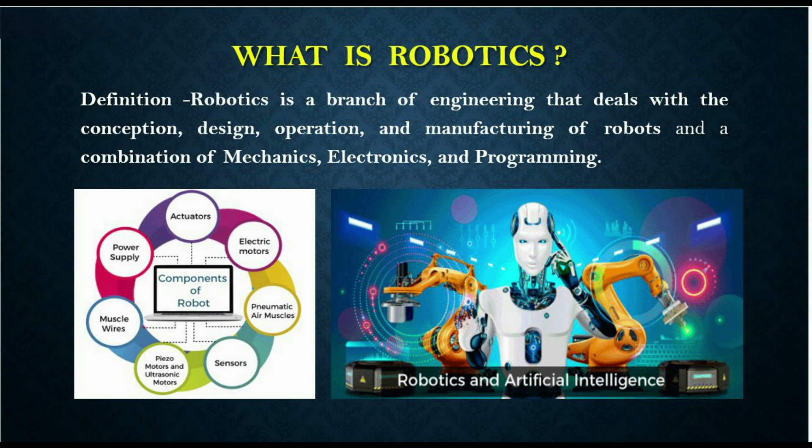How robotics is used in industrial robot companies. I'll explain some examples. The biggest four industrial robot companies are ABB, KUKA, FANUC, and Yaskawa. Another six popular industrial robotics companies are Comau, Epson, Kawasaki, Mitsubishi, Stäubli, Universal Robots, and the Cobot market.

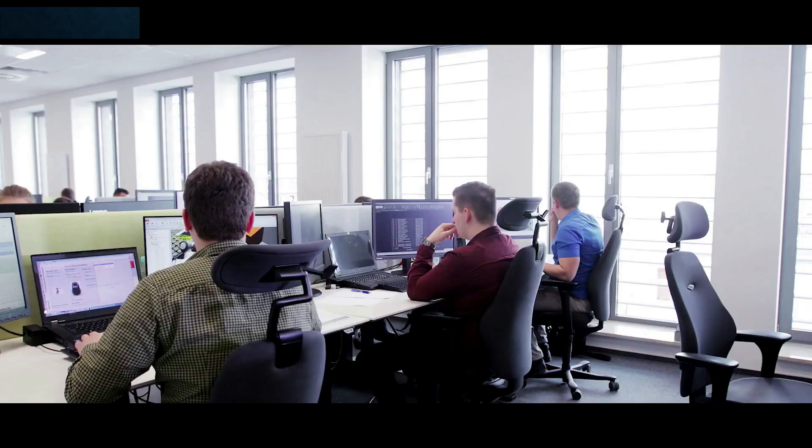Now we start the introduction of ABB Robot. ABB understands that it is time to unleash the commercial innovation of our customers and reinvent the value chain, taking a holistic approach end to end, breaking technology boundaries and delivering better service to society in a more efficient and sustainable way, like never before.

From pharma to healthcare, this plan has three steps: producing, distributing, and then operations at hospitals. Each phase faces tremendous challenges.

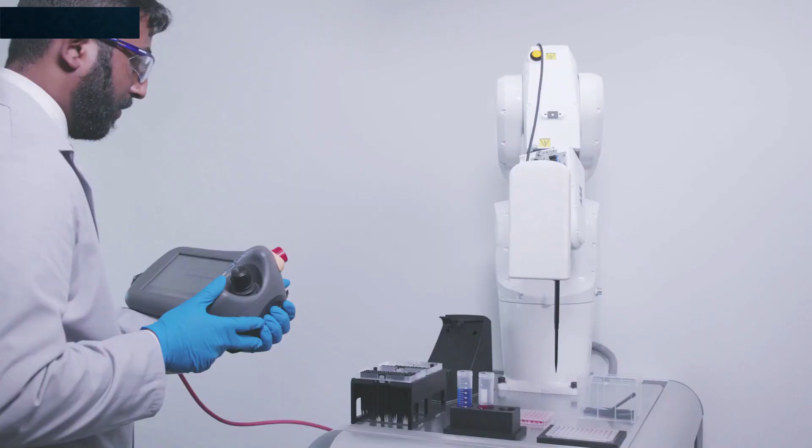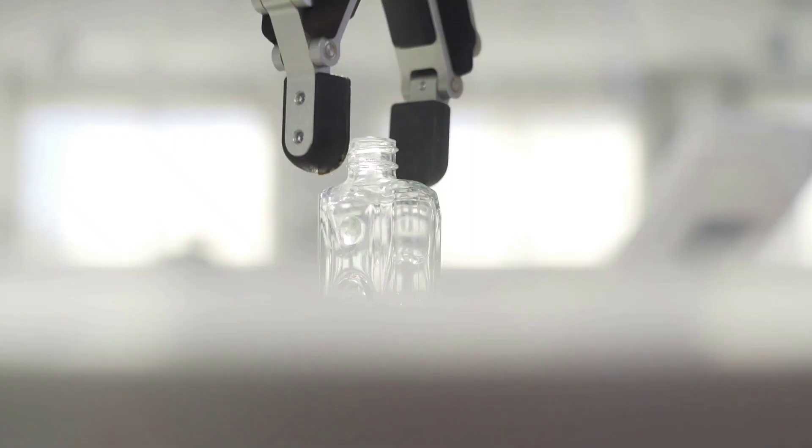The ABB Robot is used in the Texas Medical Center, USA. Josh, a healthcare solution business line manager, explains: we have more patients and more complex and advanced therapeutics to fight illness that were not possible some time ago.

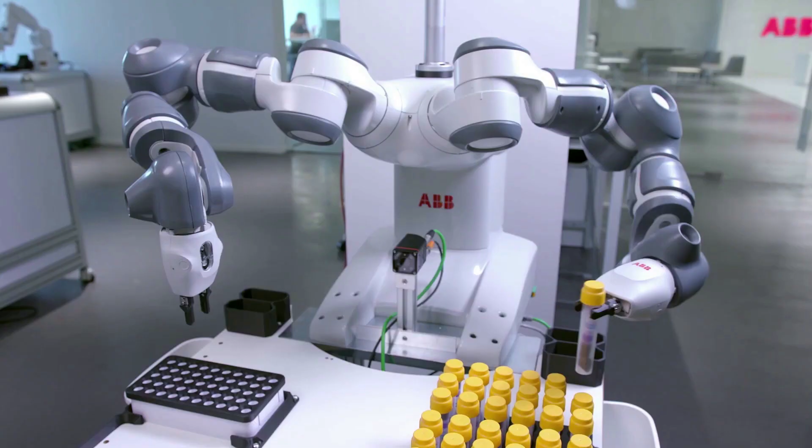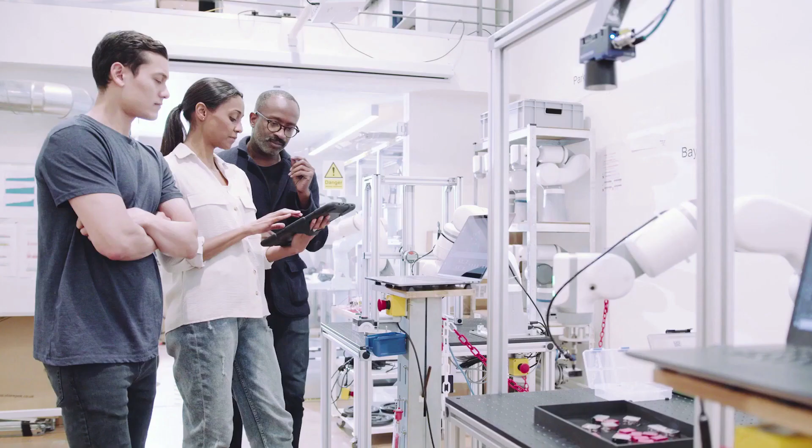At the same time, we have a lack of skilled workers, making healthcare unaffordable to many people. We are going to see new applications and new collaborative robots that will be able to adapt their work to the results of tests, but also to manufacturing of new therapeutics like biotech. If we want to help, we need to understand the issues, and how to bring a product that is stable, has the right quality, and maximum productivity in the best possible way.

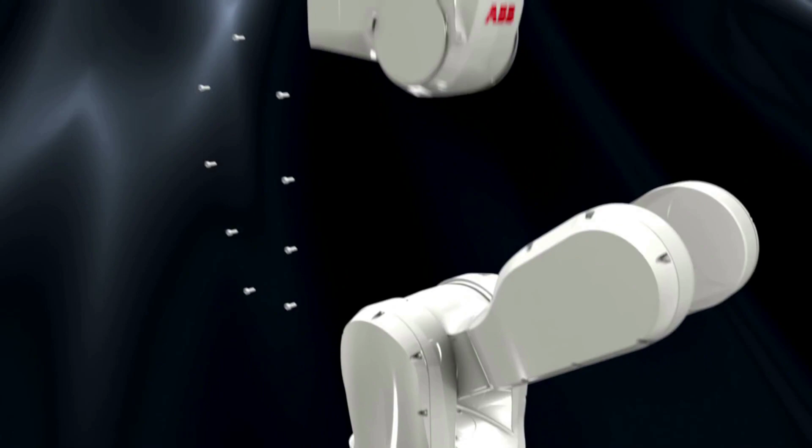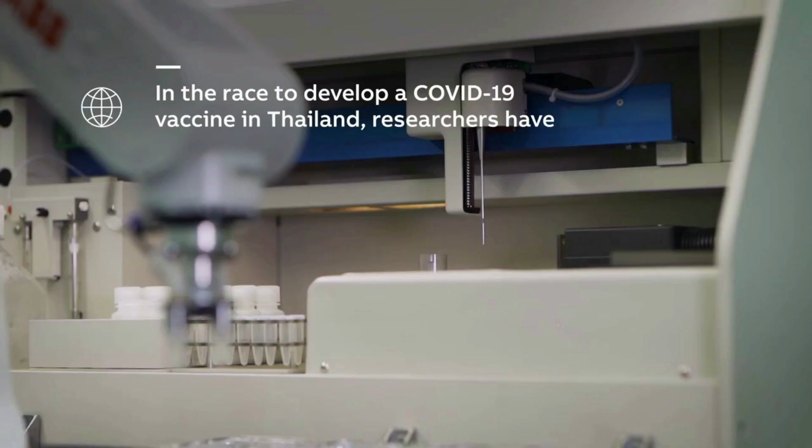We want a better planet and a better society, and technology will play a fundamental role in achieving this vision. Robotics will step out of the factories, making technology and this change more human, more related to people. One more good achievement for ABB Robotics: during the pandemic, the COVID-19 vaccine was developed at Chulalongkorn University. Just look at the example.

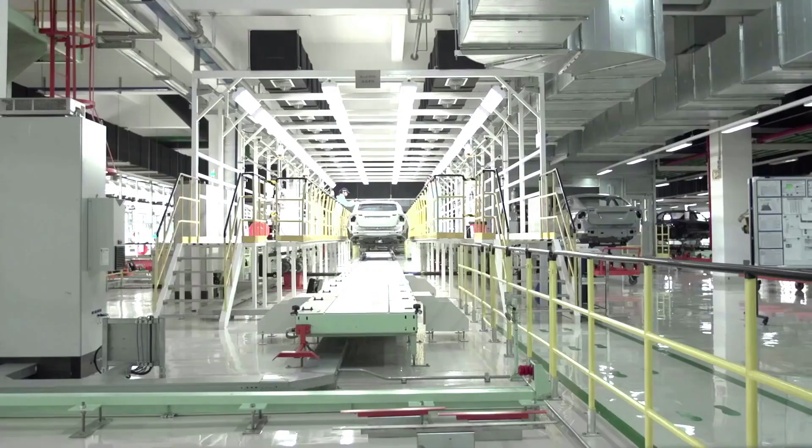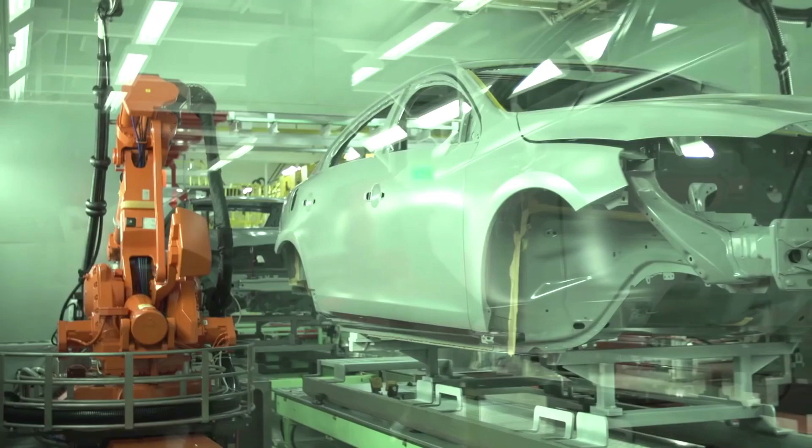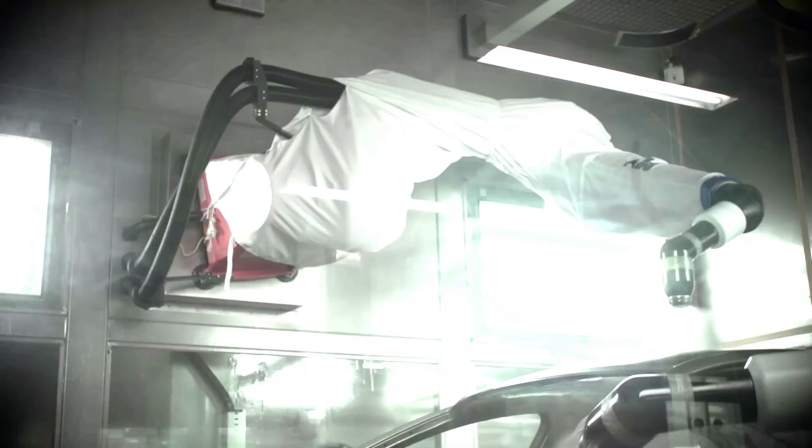ABB Robots are used in the Volvo manufacturing facility in Chengdu, China, a place of many firsts. It is the first and only factory to mass produce the new Volvo S60L. It's also the first Volvo factory located outside of Europe since the company was acquired by Zhejiang Geely Holding Group in 2010, and it's China's first automobile plant to use environmentally friendly water-based soundproofing and sealing material.

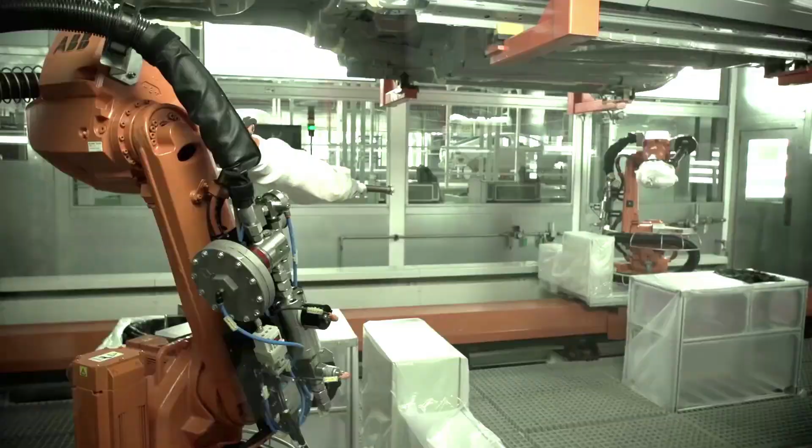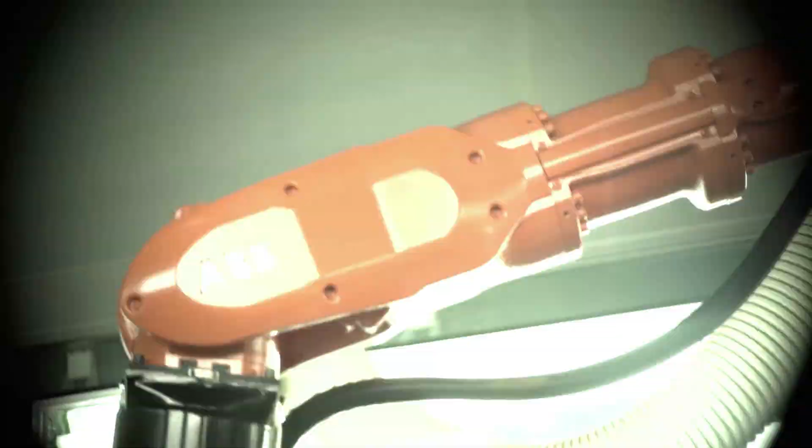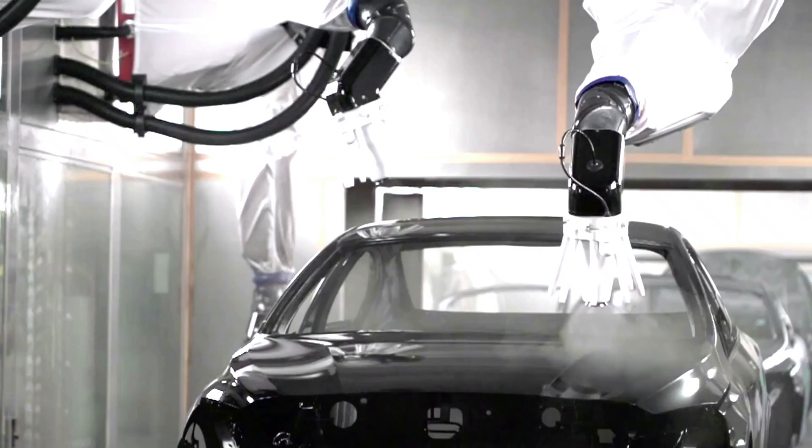Provided by ABB, Volvo is also exploring new ways to push the barrier for improving the quality of the vehicles' interior environment to fulfill quality to 100%. In some critical applications, we have chosen robot applications to ensure the Volvo standard quality. The Volvo Chengdu plant does a variety of jobs, including painting, dusting, and soundproofing.

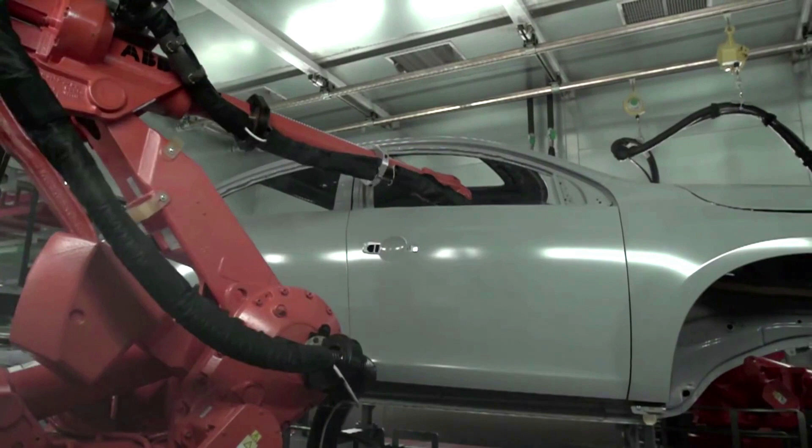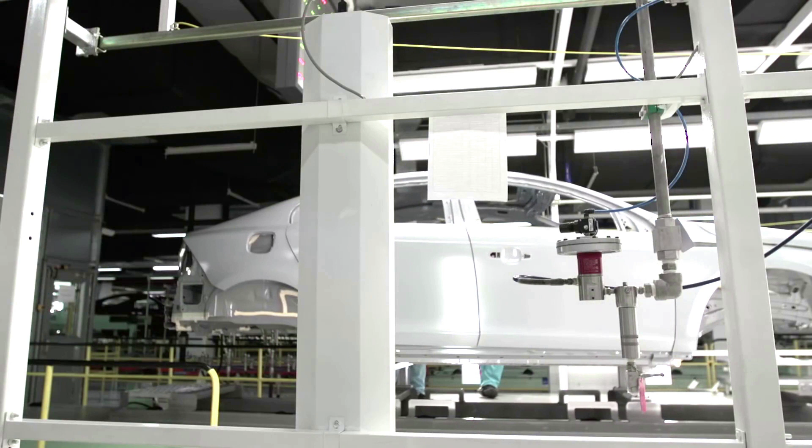The robots ensure that we consume the material efficiently, so we are limiting waste and saving floor space. We built fully automated stations where wall-mounted robots seal, paint, soundproof, and waterproof the cars, so we are working with waterborne materials: waterborne air primer, waterborne base coat, and we also introduced waterborne LASD material for the first time in China and the first time in Volvo's history, which of course improves the environment.

Now we'll see the FANUC robot. FANUC robots and factory automation solutions have been facilitating industrial production for over 60 years. FANUC is present in 120 countries, including Hungary, assisting key sectors like the automotive industry.

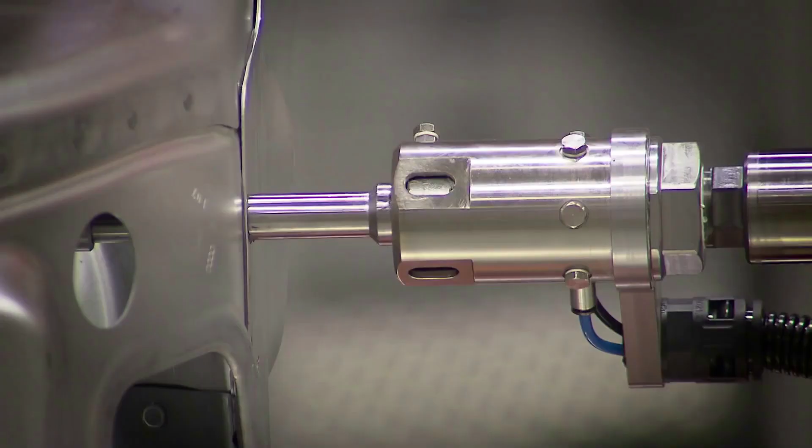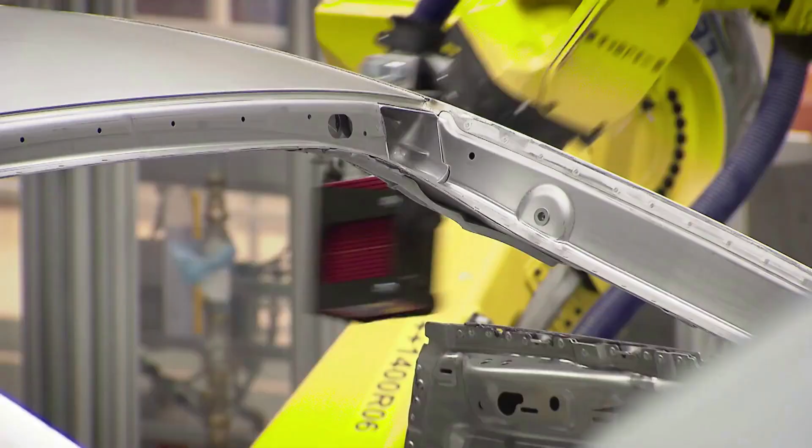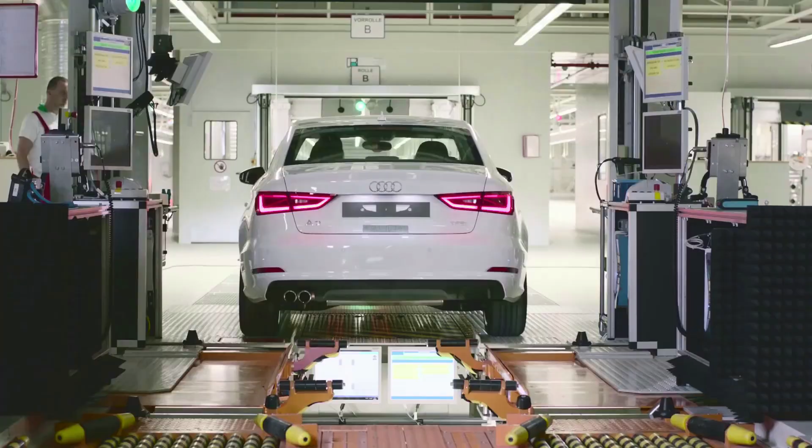For example, Audi Hungary Motor Limited factory, where they are developing and manufacturing cars for Audi AG and Volkswagen. Audi Hungary is one of the companies with the largest turnover and export in Hungary, producing 2 million engines and 135,000 cars in 2014.

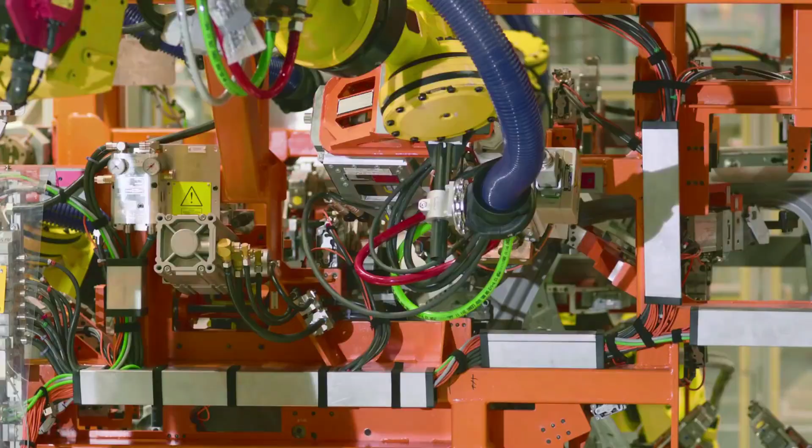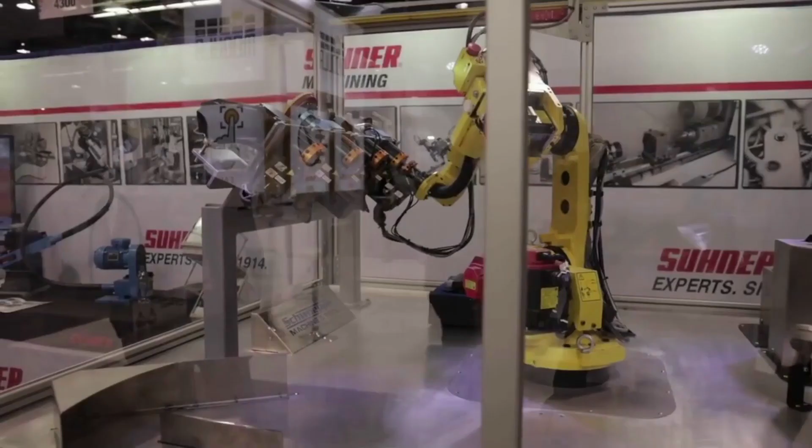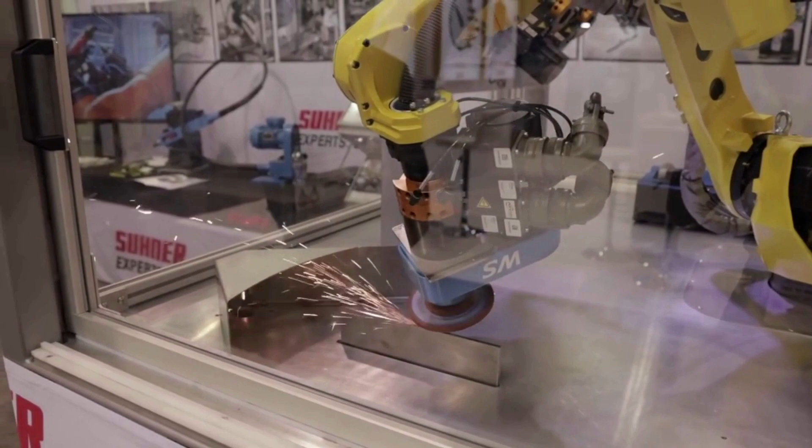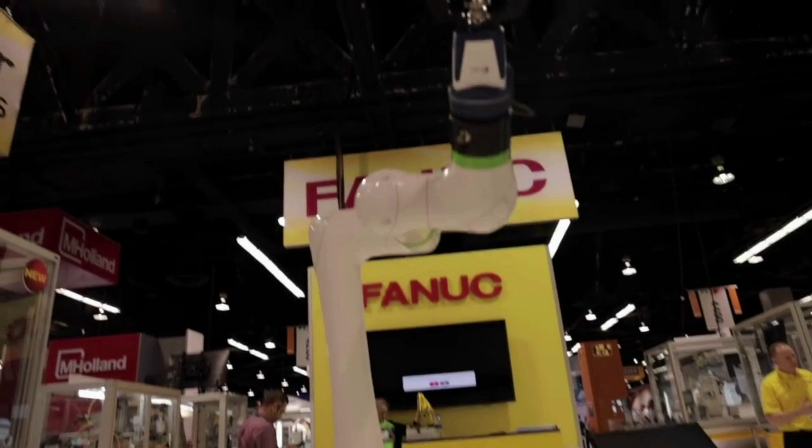We produce and install robots to reach our targets in environments where we need to work with high pressure or temperature. The robots are up to the task and deliver quality standards which would not be possible with human machining. Robots are used for applications too difficult for humans or where rapid machining is required. Our colleagues like working together with robots, as they make human work easier.

It's very important to program these robots correctly, because when problems arise, it's usually not the robot causing it, but improper programming or lack of maintenance. Regarding this, it should be highlighted that FANUC robots are easy to program, dependable, and the industry has had very good experience with them.

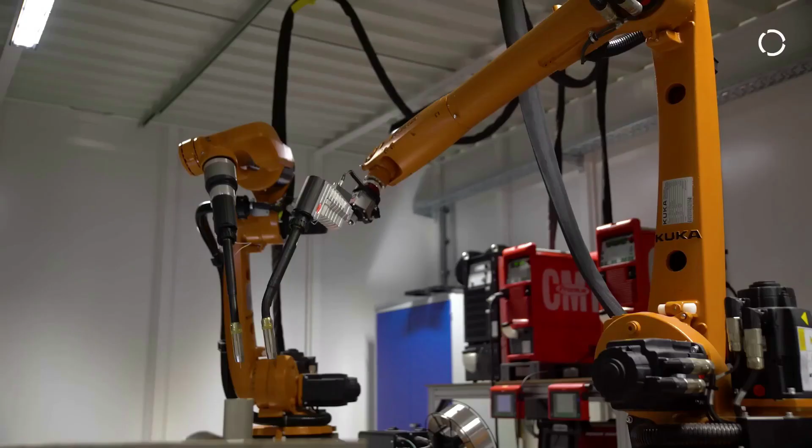We will discuss about KUKA robots. KUKA wins major order from German car manufacturer for 5,000 robots.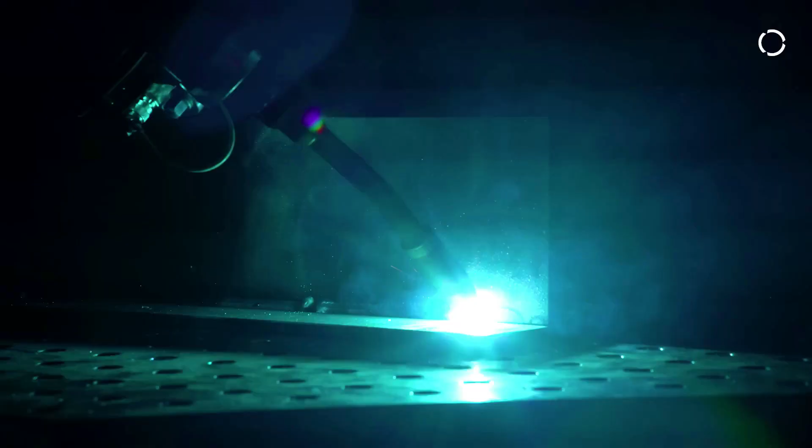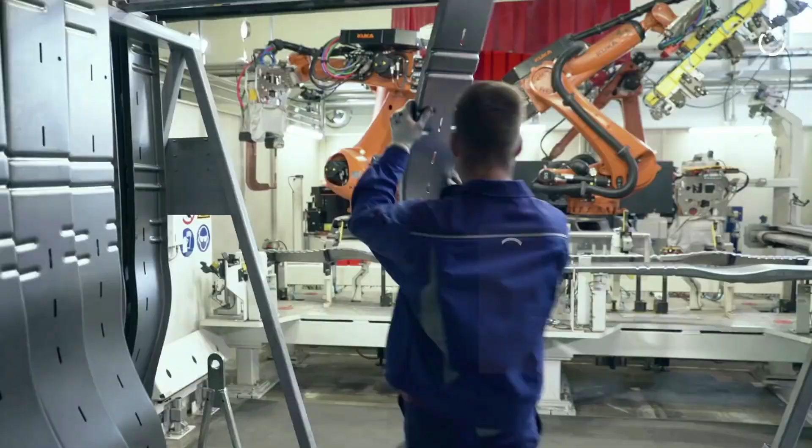The Augsburg-based automation specialist KUKA and the Munich-based automotive company BMW AG have signed a framework agreement for the supply of around 5,000 robots for new production lines and factories. The KUKA industrial robots will be used around the world at the international production sites of BMW Group for the manufacture of current and future generations of vehicle models.

The various robot models from KUKA will be used primarily in body-in-white production and other technologies.

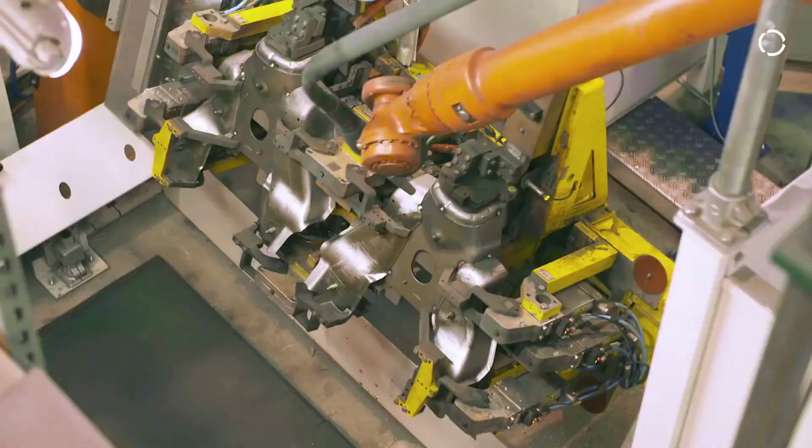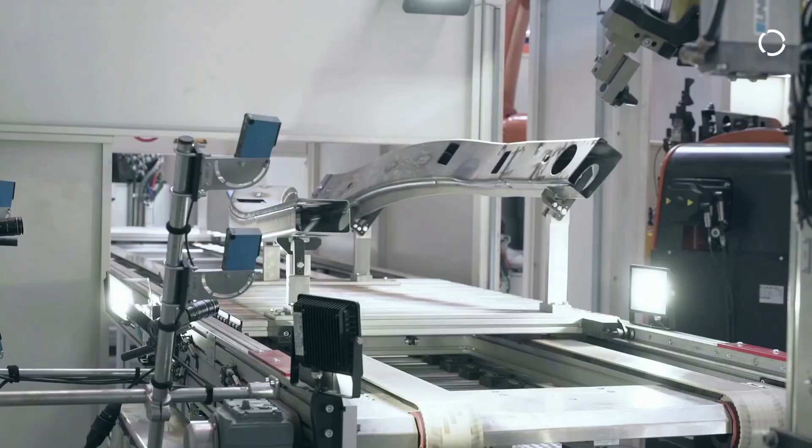Industrial robots are universally applicable moving machines with several axes which are freely programmable, that is, without mechanical intervention, and sensor-driven regarding their movement sequence, course, or angles. They can be equipped with grippers, tools, or other means of production capable of accomplishing handling and/or production tasks. Robots must not be confused with supply and removal devices or simple types of manipulators.

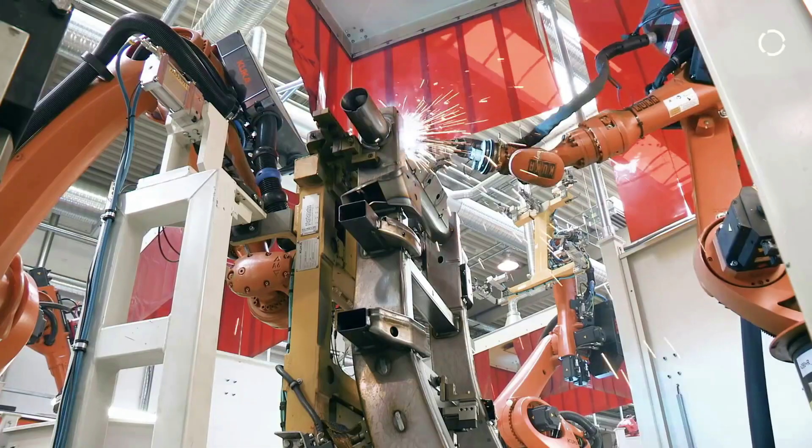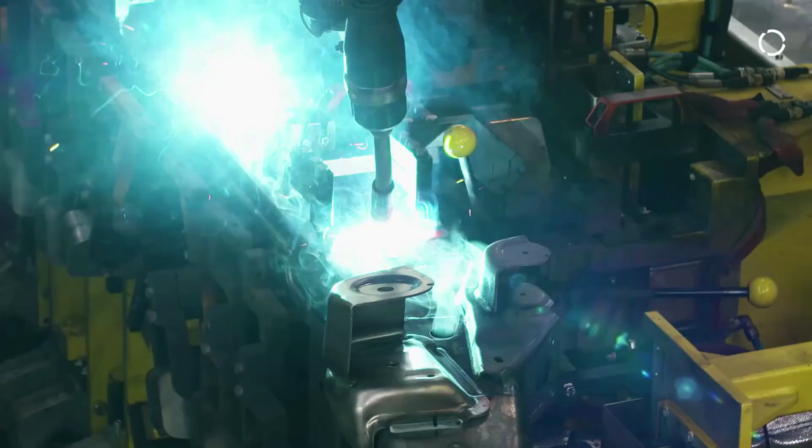Now look at the videos, I'll explain the BMW manufacturing process. As a vehicle is produced, the production process has 4 steps.

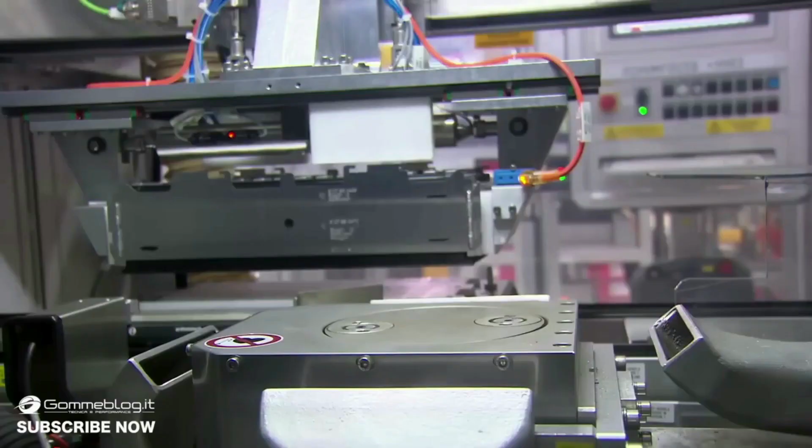The BMW Group offers premium emotions, exceptional automobiles, which are characterized by high quality and outstanding design. Automobile production with this claim is a complex process with a high logistical effort, as premium is not only best quality but delivered individually and in time.

This is made possible by a particularly efficient, customer-oriented production system of the BMW Group. The basic idea: the vehicle desired and ordered by the customer determines the automotive production process, not the vehicle plant of the company. First process: the stamping plant provides the sheet metal parts for the bodywork.

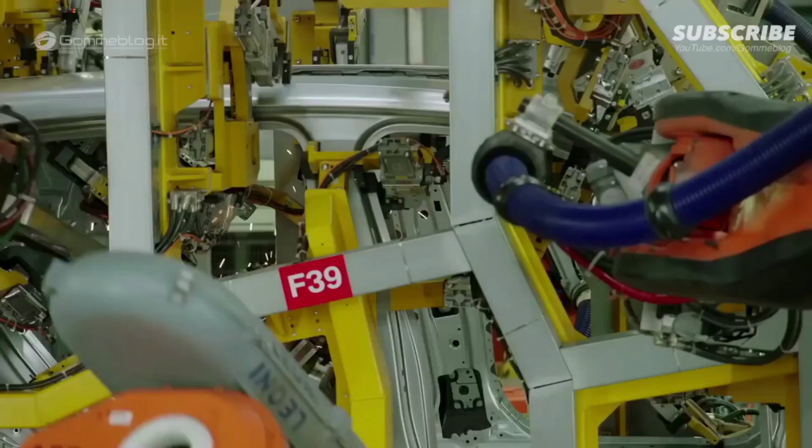The manufacturing process begins with extremely heavy rolls of steel and aluminum sheet, so-called coils. In the coil systems, the bands are initially cut to form boards and then pulled with the most modern, fully automated high-speed servo presses in several steps, bent and punched. This results in molded parts such as the side frames, doors, hoods, and roofs.

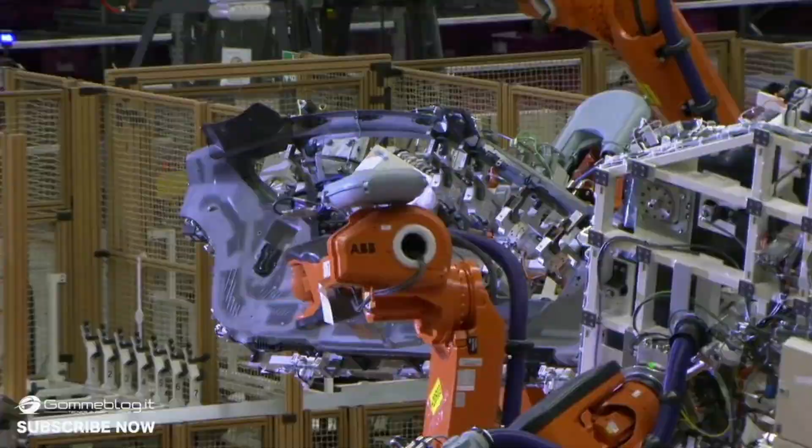The BMW Group uses a function-oriented mix of proven deep-drawing steels and higher strength materials. In the stamping production, we already lay the basics for the unique design and the extremely rigid but lightweight bodies of our vehicle.

The technology used at BMW Group is the most advanced worldwide. The available total press capacity of a plant is up to 10,000 tons.

Then second, body shop, like the precise finishing. Body shop means the precise assembly of several hundred individual parts made of steel and aluminium of different size and thickness into a precision body. Depending on the vehicle requirement, besides steel and aluminium, also carbon and fiber composite are installed.

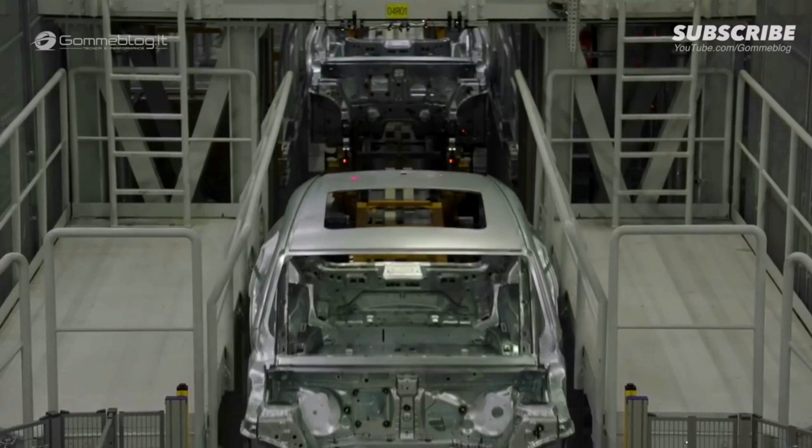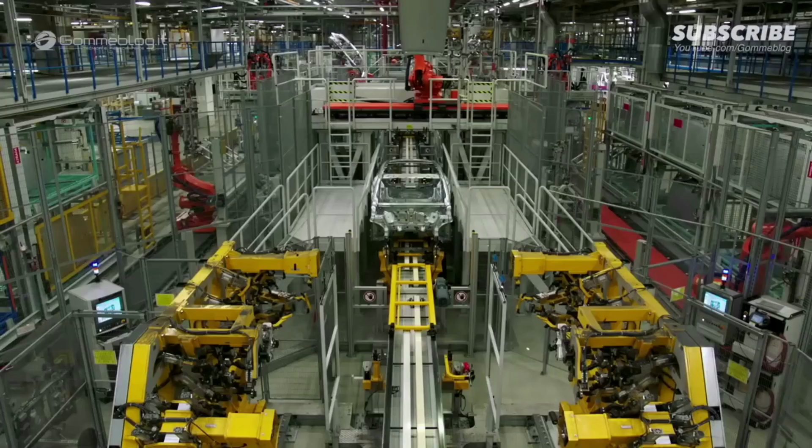With a high degree of technical know-how resulting from welding and joining techniques such as spot welding, soldering, screwing, gluing, as well as new laser welding, millimeter-accuracy bodies, the most modern robots perform this serious and complex work with maximum precision, while highly qualified employees control the machines.

Highest automation - now look at the videos. There is the highest automation, with a degree of automation of up to 95%, in the so-called spot welding. The robot here welds the body at predetermined locations. The production area of the body is highly automated technology in BMW Group production.

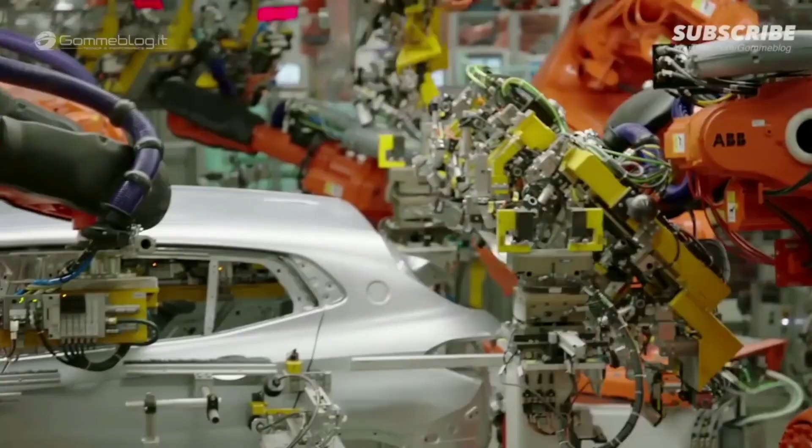All robots work simultaneously. Humans can't work there - that's why the robot is very important in industries. KUKA robots are used in the welding. The drive unit - engine, transmissions, axles, and exhaust systems - meets precisely to the corresponding body and is screwed in.

In this video, you can see how the KUKA robots are working. This will determine the robot's working and passing positions. This method is performed directly on the robot via the control box, the SmartPAD at KUKA, or by manual guidance with suitable tools, such as the Ready2_Pilot.

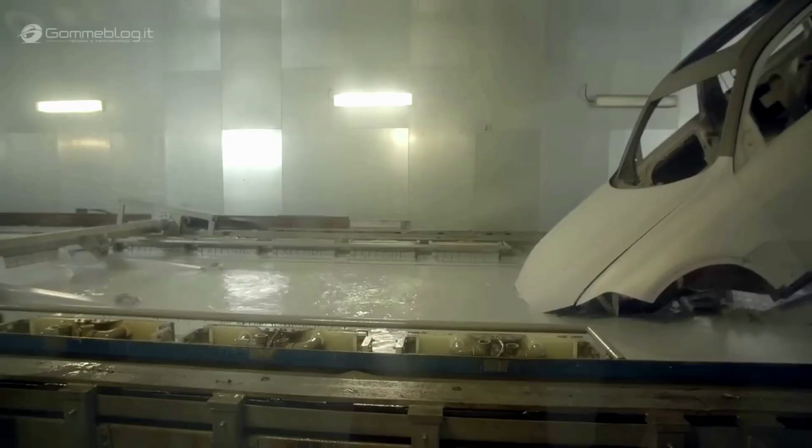Then third point: paint, brilliance with function. Hardly any detail of an automobile acts so strongly on the senses like the color of the paint. At the same time, it serves to protect and preserve the value of the automobile.

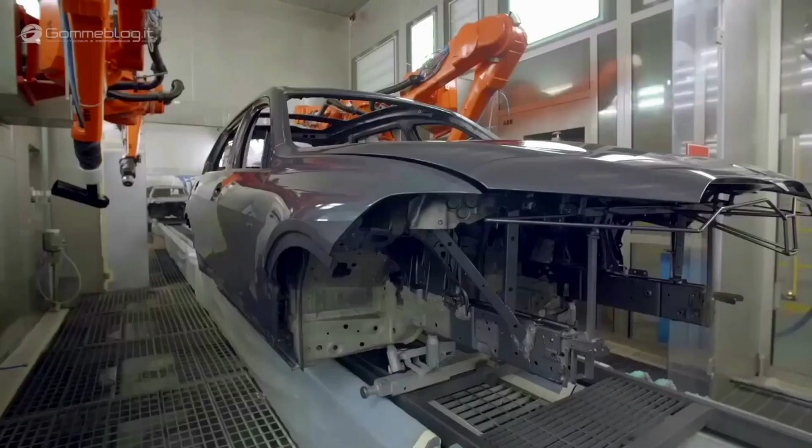But the bodies are first cleaned in plunge pools and degreased, then coated with a zinc phosphate layer. This forms the basis of lasting corrosion protection. Then 4 more coats of paint protect the vehicle against environmental influences and give a durable color gloss.

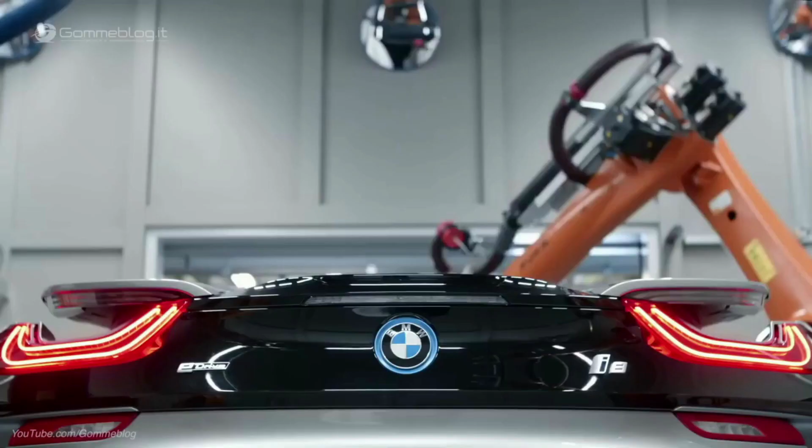After each production step, the quality is checked in the paint laboratory through specialized exams, for example environmental simulations, testing the color fastness of the coating and resistance to environmental influences.

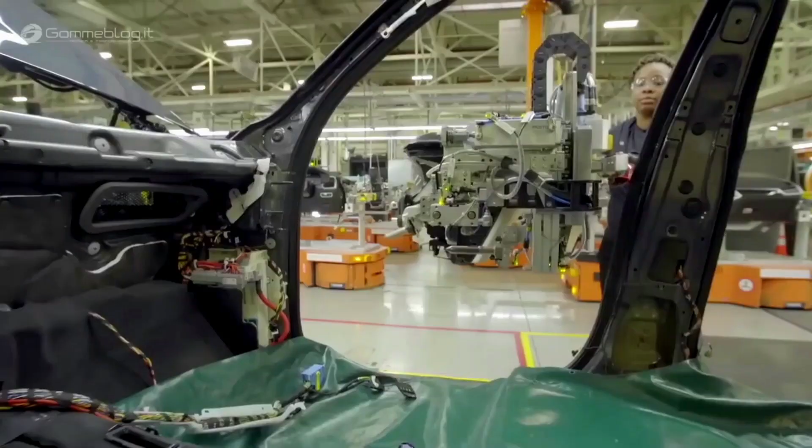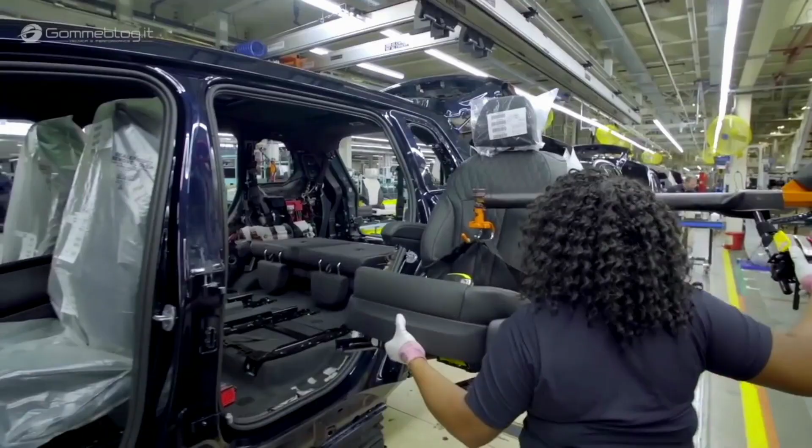In the fourth step, the KUKA robot does the mounting individually and precisely, work that employees can't do at the same rate. Experienced and well-trained staff complete the painted bodies. In the course of individual production, even unusual customer requests can be realized.

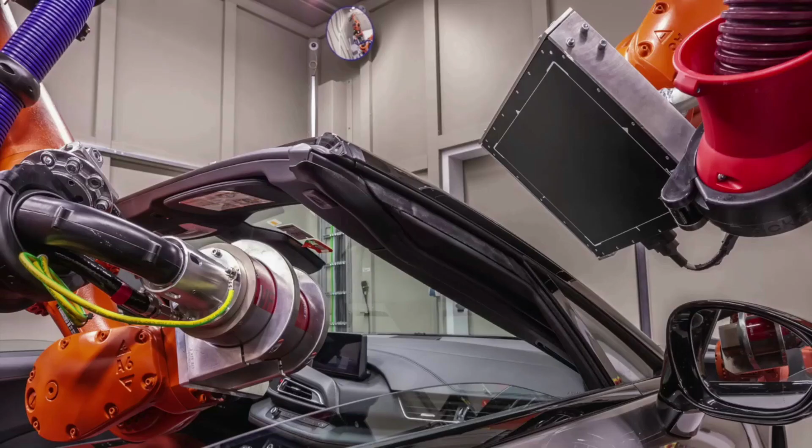KUKA robots work in the final assembly. Within final assembly, the highlights of the entire production take place. The last parts are mounted and the engine is started for the first time. After numerous tests, the new vehicle rolls off the line.

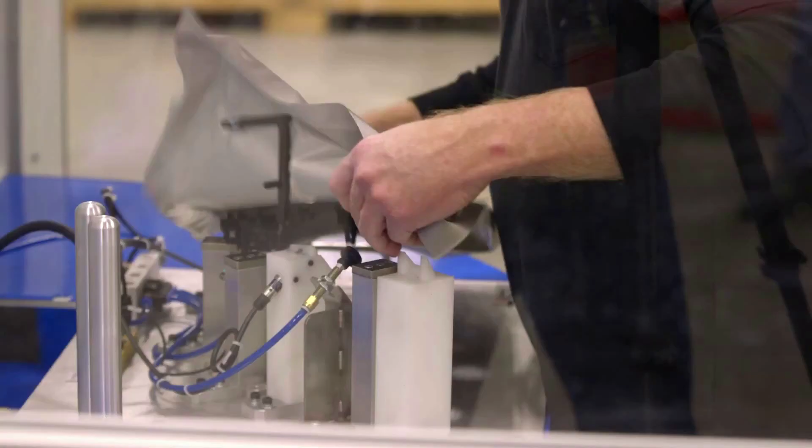Now the Yaskawa robot. We will first look at the types and structure of industrial robots. The Yaskawa robot is used for ultrasonic cutting and routing, secondary processing for plastic, fabrics, foams and composites.

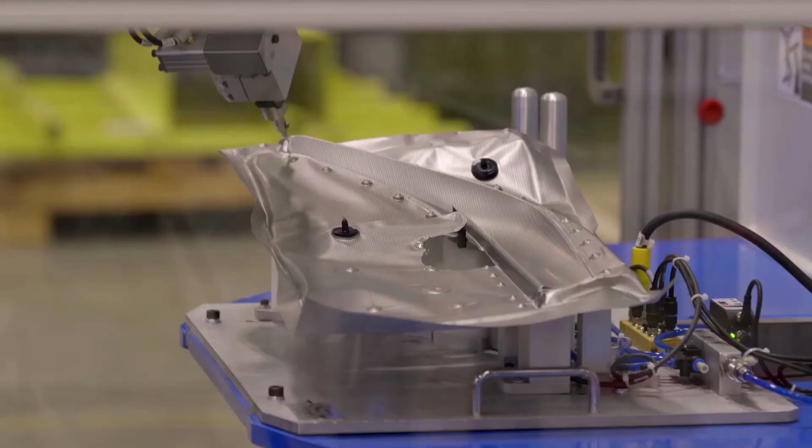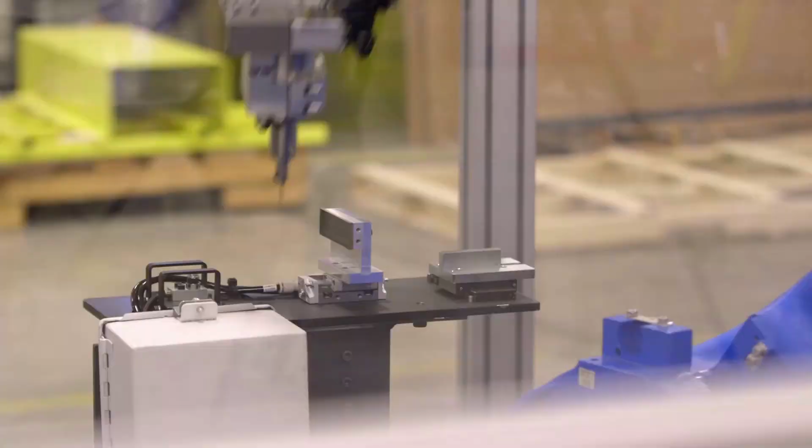Let's look at videos of how customized buyers of custom designed plastic, fiber and composite components are demanding shorter runs with a high level of customization. If your current tools are not viable for handling low volume orders, it's time to consider solutions that expand your capability to be agile and profitable without compromising quality.

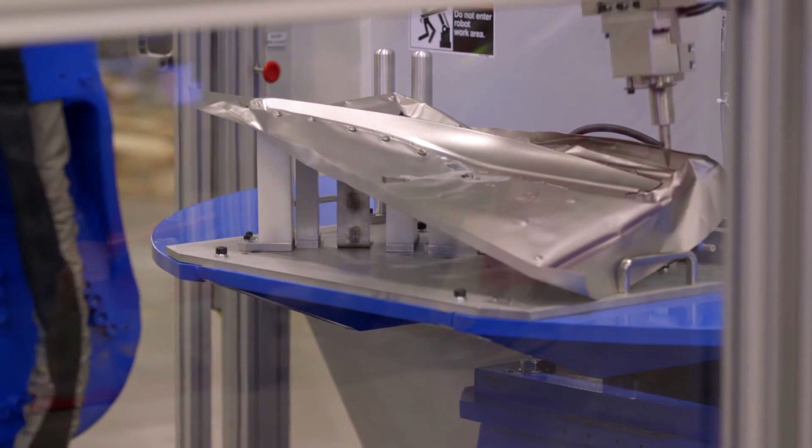One more thing about the Yaskawa Motoman robot: Yaskawa Motoman has partnered with world-class cutting technology and industrial integration providers to offer a suite of robot guidance, ultrasonic, and routing tools designed to work with a multitude of cuts and materials.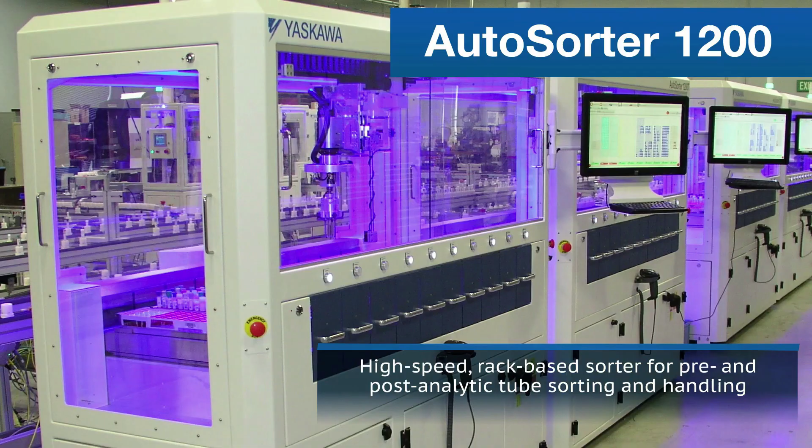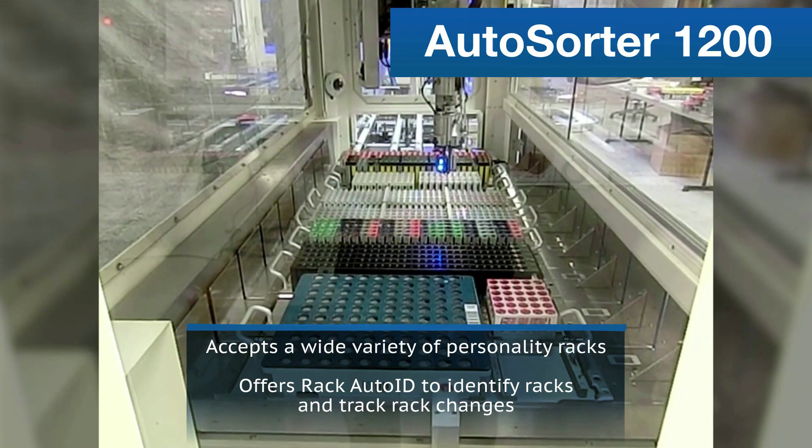Now the clinic lab solution. Yaskawa uses standalone instruments, including a high-speed rack-based sorter for pre- and post-analytic tube sorting and handling. It accepts a wide variety of personality racks and offers rack auto ID to identify racks and track rack changes. We set up the track to identify images, containers, and labels to relabel containers. Look at the track system in the video.

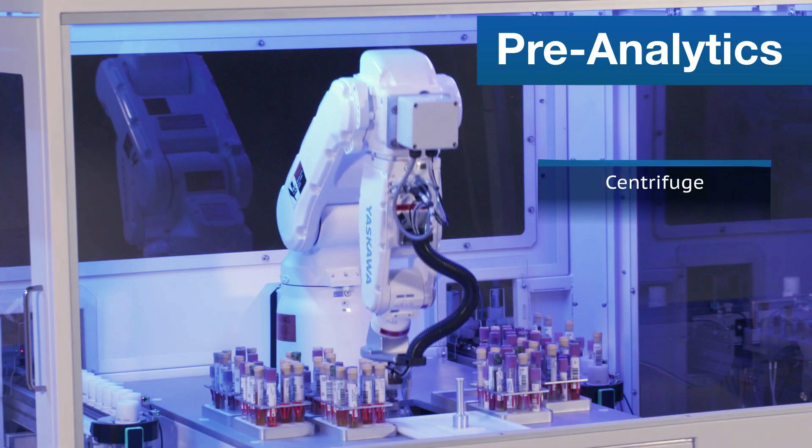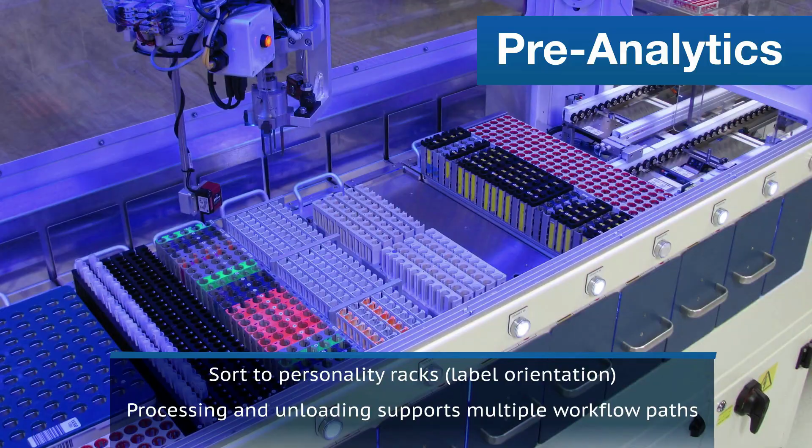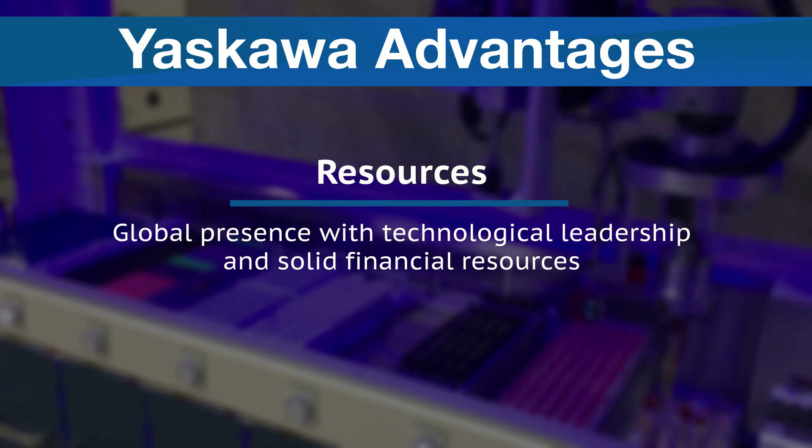Yaskawa industrial robots are among the more than 2.7 million industrial robots operating around the world, indispensable equipment for the production of automobiles, home appliances, PCs, smartphones and other products in factories and other places rarely seen in everyday life. Yaskawa announced Japan's first all-electric industrial robot under the brand name Motoman in 1977.

Since then we have shipped nearly 500,000 units. You can check the value published by the International Federation of Robotics in 2020.

So there are also VFDs. VFD means variable frequency drives. The latest VFD robotics are now also available in the market.

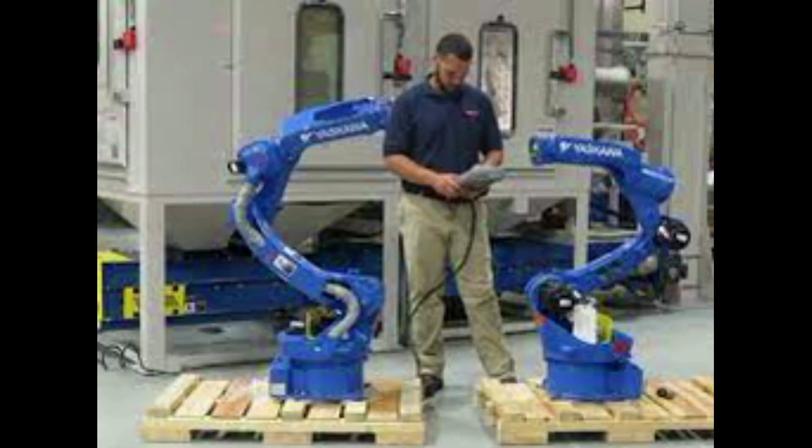Yaskawa developed and optimized servo motors, the main components of industrial robots Motoman, by ourselves. Aside from control software technology that maximizes this capability, we are developing industrial robots by integrating application technology that realizes optimum structures and functions for applications such as welding and painting.

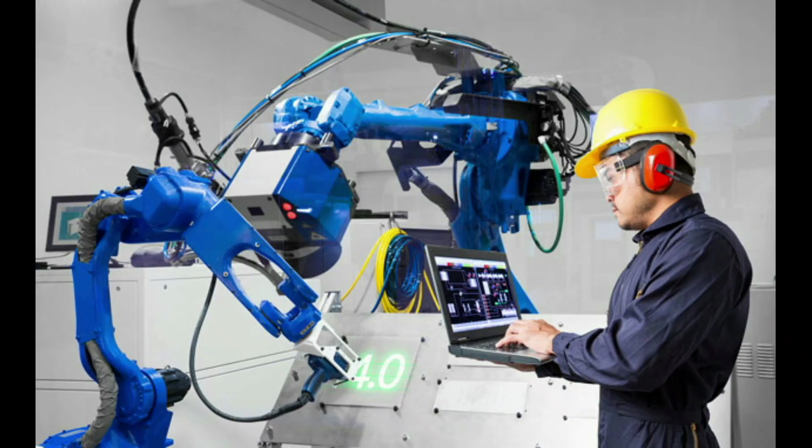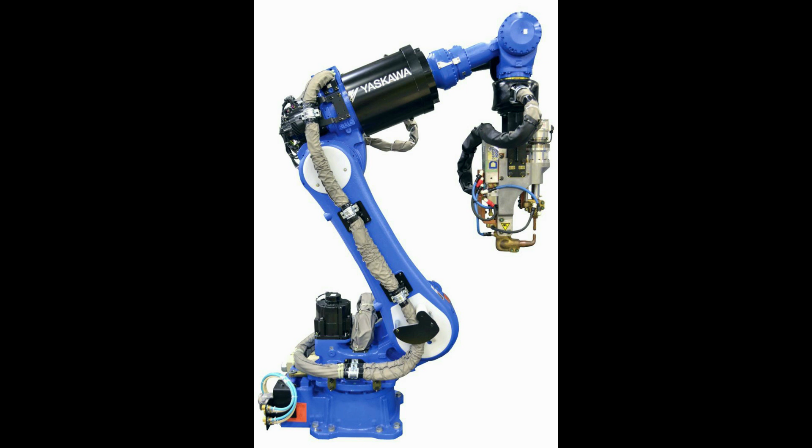In response to current trends such as IoT, Industry 4.0 and artificial intelligence, Yaskawa is promoting i3 Mechatronics as a solution concept for realizing a new industrial automation revolution. Yaskawa's industrial robots are the core product to realize this concept by collecting, accumulating and analyzing the state of the servo motors that make up the body and the results of operations. They contribute to improving productivity and quality through stable operation of facilities and lines at customers' production sites.

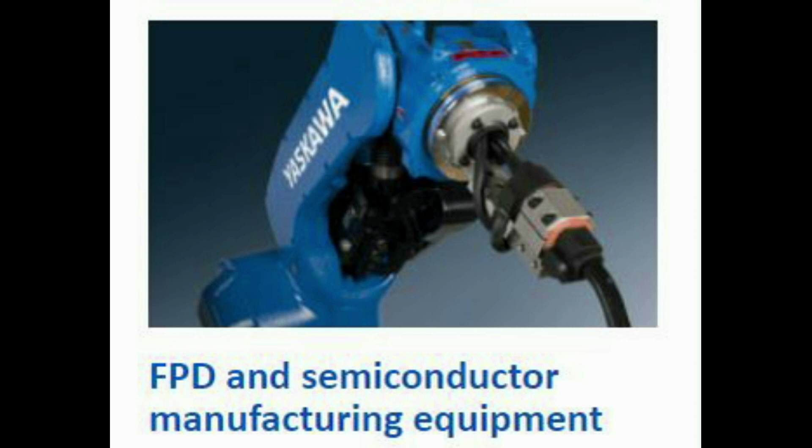Besides automobiles, Yaskawa's industrial robots are now used in a wide range of industries including electric and electronics equipment, semiconductor manufacturing, biomedical, food, medical products, logistics and so on. Let's introduce what kind of robots are active in each industry.

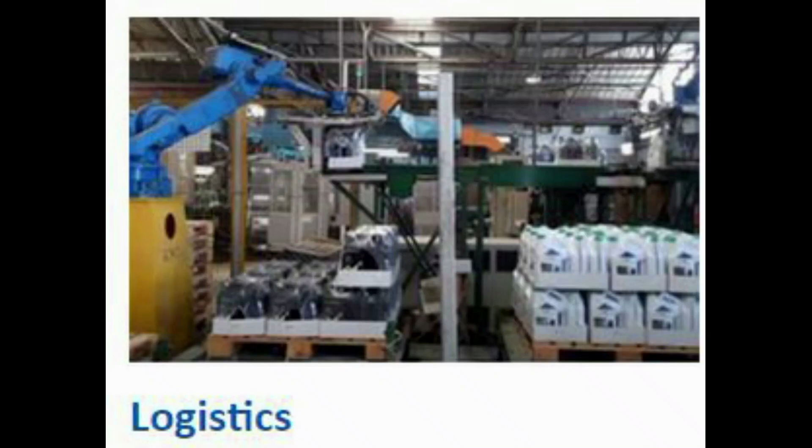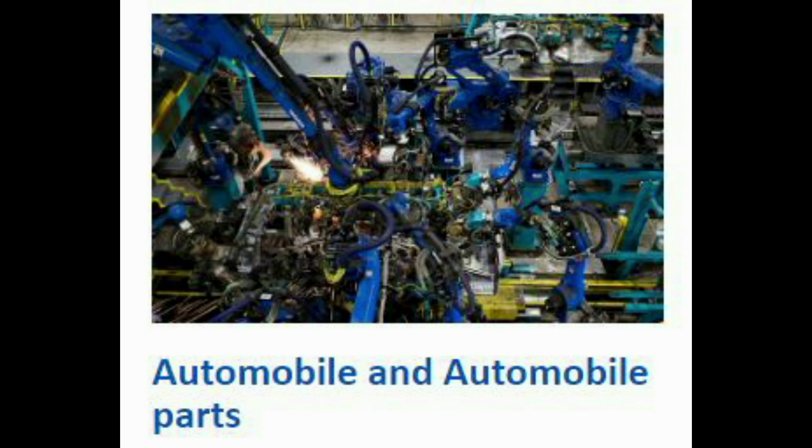Logistics: in the online shopping market, where demand is rapidly increasing, handling robots are playing an active role in sorting warehouses and transporting cardboard. Automobiles and automobile parts: a lot of robots are used here like KUKA, Fanuc, ABB, but now Yaskawa is also used in this market, which is the largest application field of industrial robots.

Yaskawa is used in electrical and electronics equipment. High speed, high performance industrial robots are being used in processes such as mounting on boards at the manufacturing sites of home appliances, where demand is expected to increase.

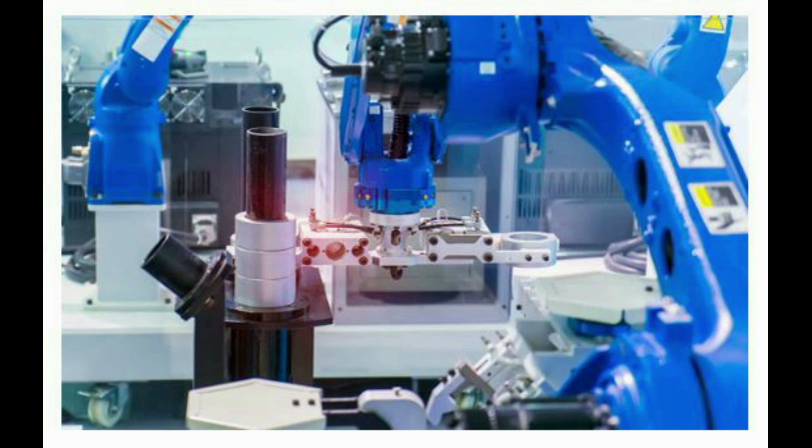Yaskawa is used in FPD and semiconductor manufacturing equipment in the process of transporting glass substrates used in personal computers, smartphones and flat screen TVs. Industrial robots that perform precise motions are indispensable here.

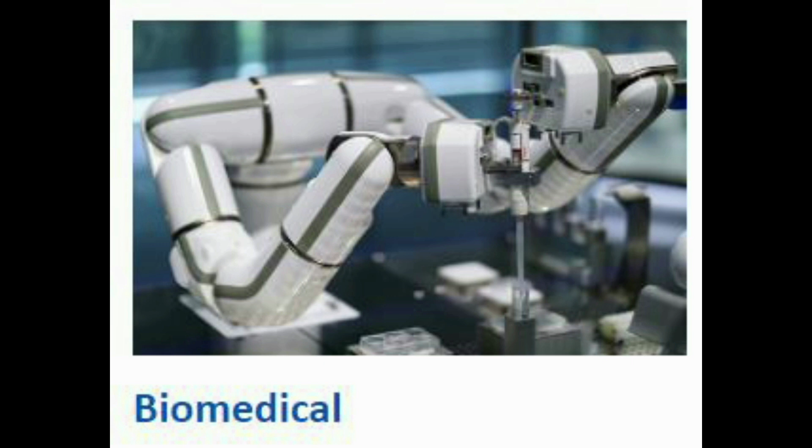Yaskawa is developing robots for the biomedical industry that enable high precision motions under hygiene control for research labs. These Yaskawa robots are used in food industries as well, in various processes such as filling materials or closing lids of lunchboxes at food factories, for the food market such as convenience stores and supermarkets.